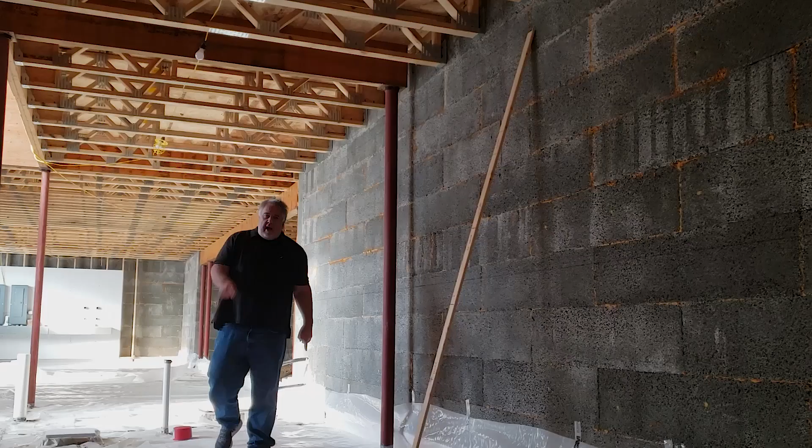We're back out at the Vineyard Passive House, and even though I'm in the basement here, we're not talking about the basement anymore. We're going to talk about floor framing because I think we did some pretty cool stuff here that is somewhat atypical, but it's a really good solution for what we got going on there.

If you remember, we did our foundation out of the Perfect block. We got 11 courses here. They're 12-inch blocks. We got 11 feet, yields about a 10-foot ceiling here. But one of the issues, if you remember when we talked about the Perfect block, was how do we put the floor frame and get it closer to the ground?

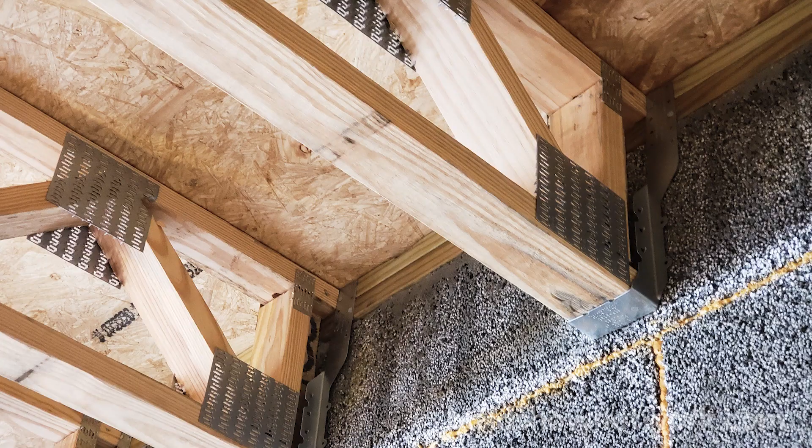Well, the solution was, you can see, we hung the floor frame inside the block foundation. So we have these Simpson hangers that are actually saddle hangers. They go up and they go over the top of the mud sill, and we'll look at this in detail. But you can see basically the whole floor frame is hung down inside the foundation wall. So that means that we can bring our grade up much higher. So the outside ground is pretty much right about the level of the bottom of these floor joists.

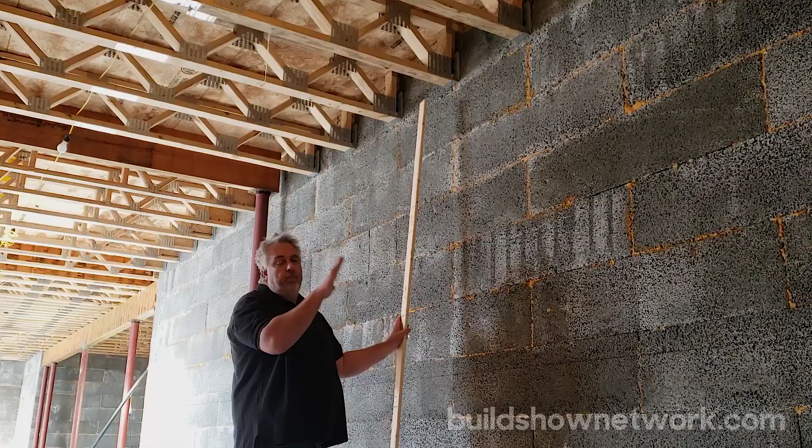These are an open web, trimmable joist, so you can see all the services we can run through, plumbing, etc. through there. But you can also notice on this side, it has this trimmable edge. Now this one is damn near trimmed to the end, but this comes out where this trimmable edge is about 12 inches, so that you can cut it to length here on the site. So we don't need this perfectly measured floor truss. They send them out slightly oversized and then we trim them back.

But again, just dropping that floor frame in here makes a world of difference. We can jump outside and we'll talk about it a little further, and it may help put it a little bit more in perspective. So let's jump outside and take a look.

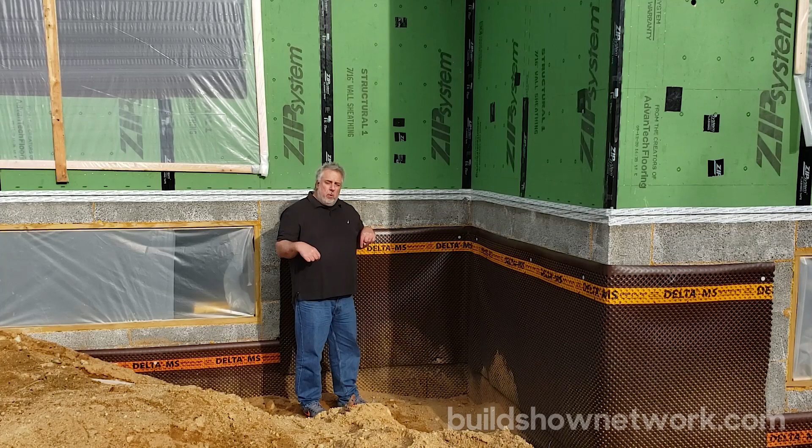All right, so we're down in the basement, we talked about that floor frame. We jumped outside here to give you the exterior perspective. I'm down in a hole. You can see we started backfilling the foundation. Perfect block recommends some type of waterproofing or drainage system. So here we went with a Dorken Delta mat. You can see it's a dimpled mat that once it gets pushed up, water has the ability to infiltrate and go all the way down.

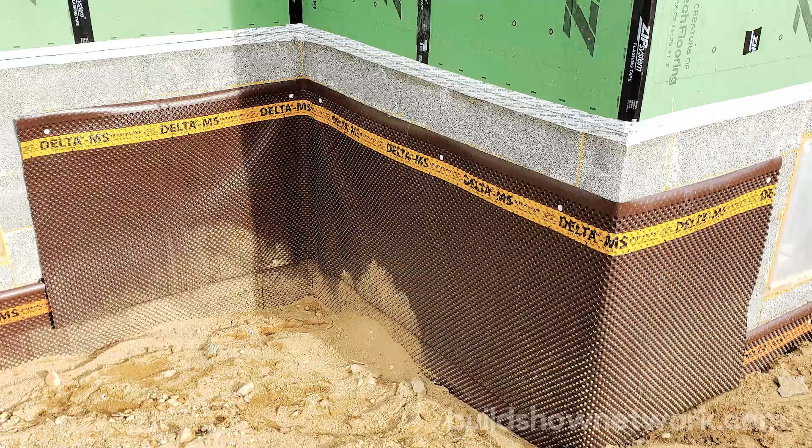Now, in this house here, we don't have a perimeter drain, and it's always measured by the amount of risk that needs to be taken. In this case here, this sand goes down for many feet. You could pour buckets of water, it just literally disappears. So we don't have that high water table or the risk of having any water accumulate. We just need to get groundwater to move down fast along the foundation. So the Delta MS mat is going to handle that for us. It's going to run that water down, get rid of it.

But we're up here more to talk about the relationship of that floor frame. Remember, this is the top of the Perfect block. So our floor joists downstairs are hung down, probably about 12 inches or so, and the saddle hanger sits on top of the mud sill. So basically, the bottom of that truss is right here where my hand is, where the grade is roughly. And the floor is right here. So the grade will finish here. We'll be about a foot above grade with that floor.

Now the difference is if we did that traditional framed floor, instead of being in here, we'd be up here somewhere. So we'd have to make up that difference in the steps. And talking with Farley, who's the homeowner here, we want to try and get that down as close as we can, so any of our doors is a single step out.

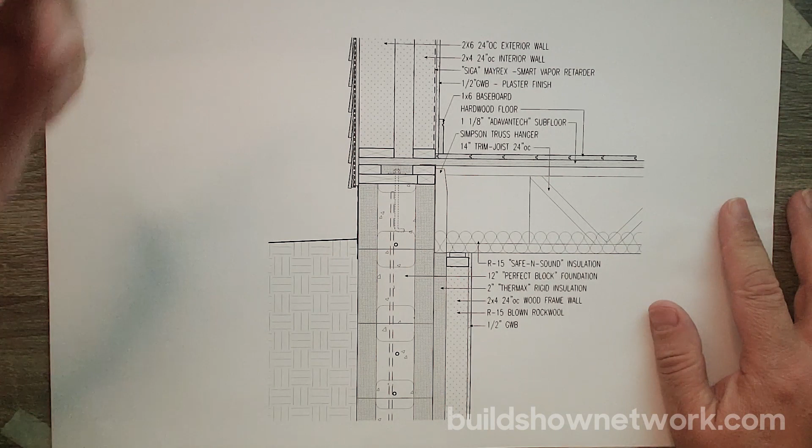So, let's get out our good friend, Big Red, and let's break out a detail and let's talk about what we saw out there. So let's get at it. We got our detail. Means we got action. All right, so let's figure out where we are. Let's get some orientation here.

Foundation wall, better known as the Perfect Block. If you haven't seen those videos from the previous versions, suggest go check them out. Not only do we talk about the Perfect Block, we caught Farley and his guys for a couple days, followed them around while they were installing the block. So you get to see it all get installed. It's a really cool product.

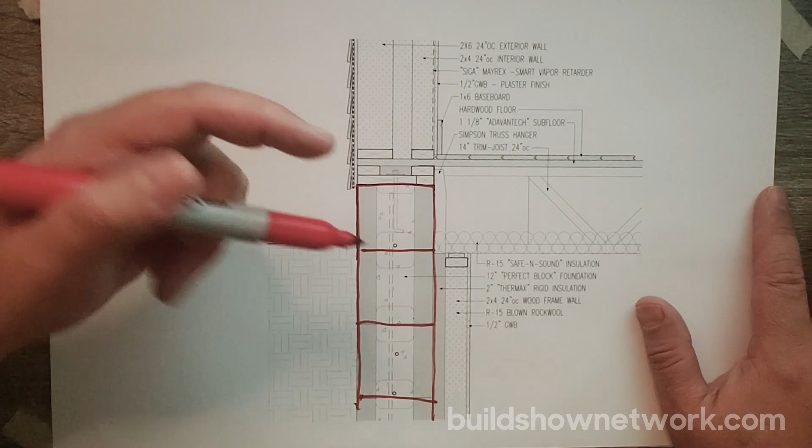It's an ICCF, which is insulated composite concrete form. This is all recycled EPS. So it's doing a good thing by having those EPS boundaries on the block and minimizing that concrete core. We take out about 70% of the concrete out of the foundation wall in doing this foundation system.

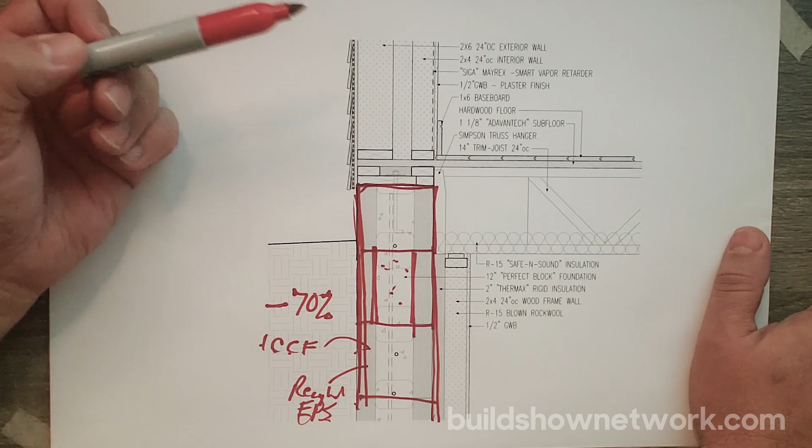And the thing is we really didn't have to pour it or add any block other than what we would normally do. Now, we talked about it out there. We got a 10-foot roughish basement height, but that's because we added a few blocks to get the basement height. Adding the block did absolutely nothing for this detail. What we did in this detail was basically relocate the position of the floor frame.

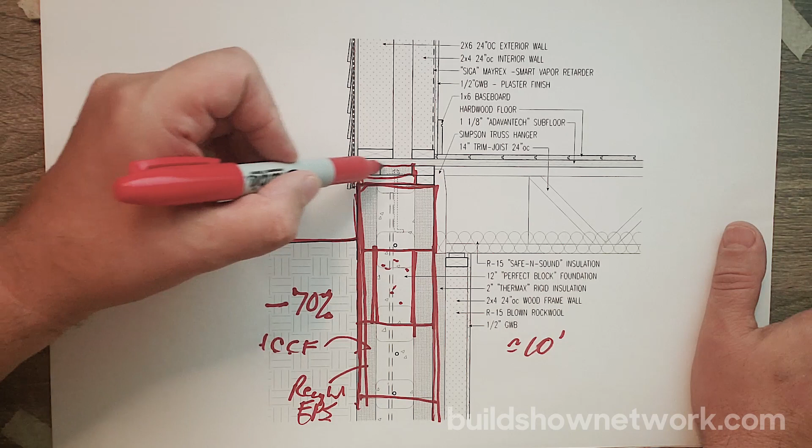If we had the block here, and here we have our grade, finish grade, and top of block, right there, well, that dimension, X, remains unchanged regardless of what we do. But the difference is everything after that point. Typically, we would do a mud sill. In New England, we would do a double mud sill. We'd anchor bolt that in, and we have our reinforcing.

But then we would come in here. We would typically run our band joist and run our floor joist off the top of that and have our subfloor. So you'd see our subfloor frame would be pretty darn high. Typically, this is on the order of maybe about 25 inches, plus or minus.

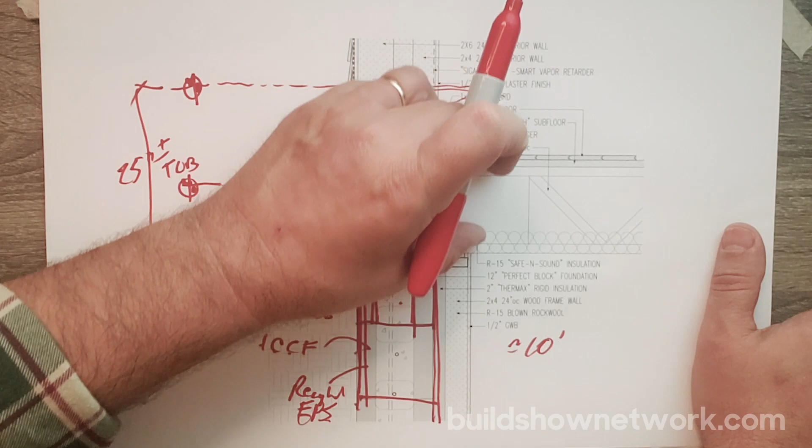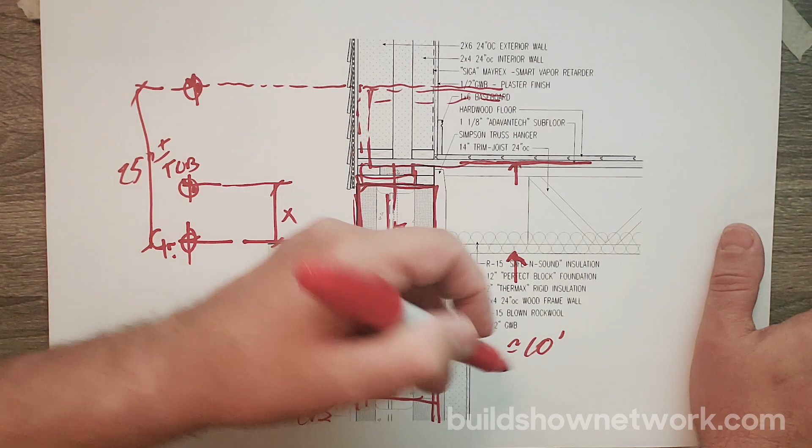But by taking this floor frame and sliding it down inside the belly, well, yeah, it reduces what would have been the ceiling height here to the ceiling height here, but that's simply solved by just adding a course of block in the wall. What you're doing is pushing the slab deeper into the ground to get that 10-foot height. But the relationship of top of block to grade would remain unchanged. Slab to grade is the dimension that changes.

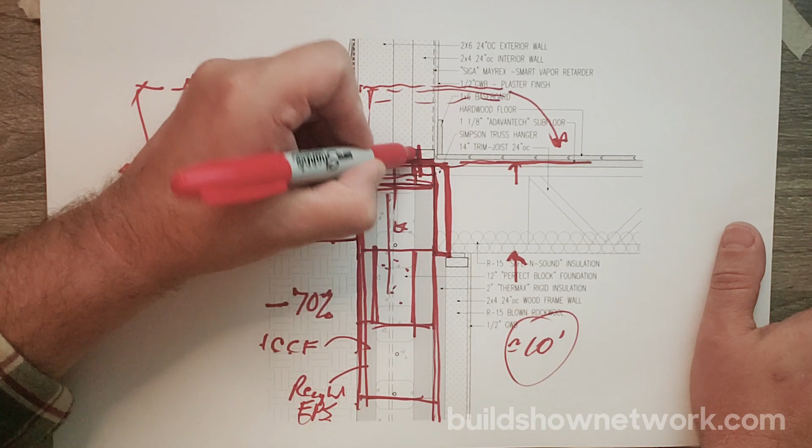But taking this and moving it down, well, we have our double mud sill. We had to add a couple blocks out here, but then we worked with Simpson to get the right hanger, and basically we installed this saddle hanger, and it gets attached up here and basically just receives that floor truss.

Now, the floor trusses out here, they're a pre-manufactured item, but they're what's called a trimmable floor joist, or floor truss. So they come out with a solid end piece, and that solid end piece can get trimmed. Typically, this is about 24 inches of trimmable length, and we just trimmed it back. You can see the one out there in the video on the site. We trimmed it back pretty significantly.

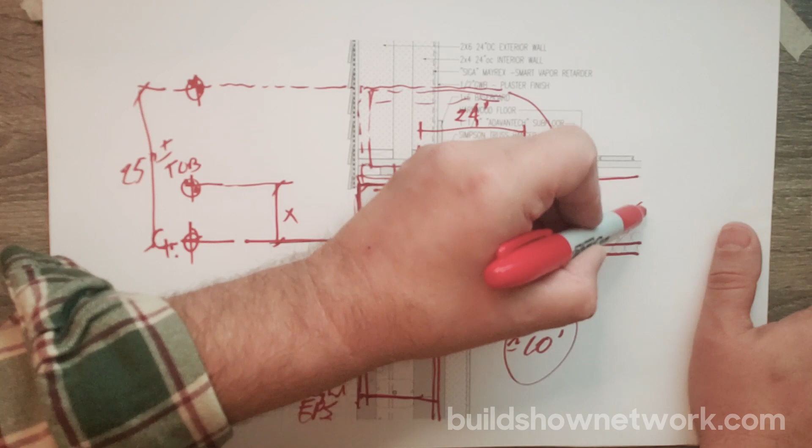And then it has the open web truss, so we can run utilities through that system. So having that trimmable end means we get the benefit of the floor truss, but we don't have to get that exact length and get those pre-manufactured to a very specific length.

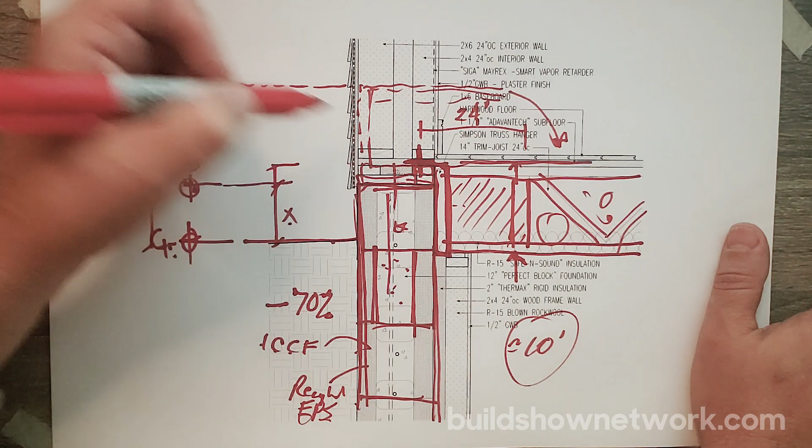They get sent out there within 24 inches, and we trim them to size. But you can see by moving that down, we basically have our X dimension plus the double mud sill plus the subfloor, and then that gets us kind of our floor, top of floor here, dimension down to grade, right?

And you can see that's a significant drop from what is a traditional floor frame to what we did out there. And the beauty of that is by bringing this down, the client really wanted to be able to just come in here and put in something like a granite block and have that one step down to the granite block and then one step down to grade, rather than have this up here with some kind of wood frame and handrails and multiple steps down to grade.

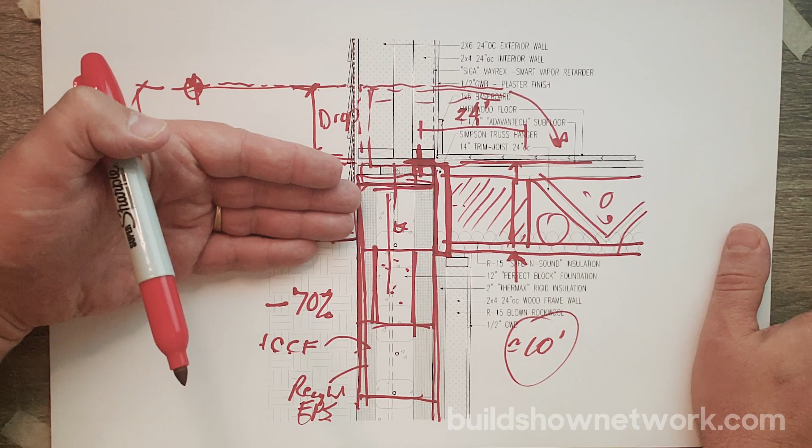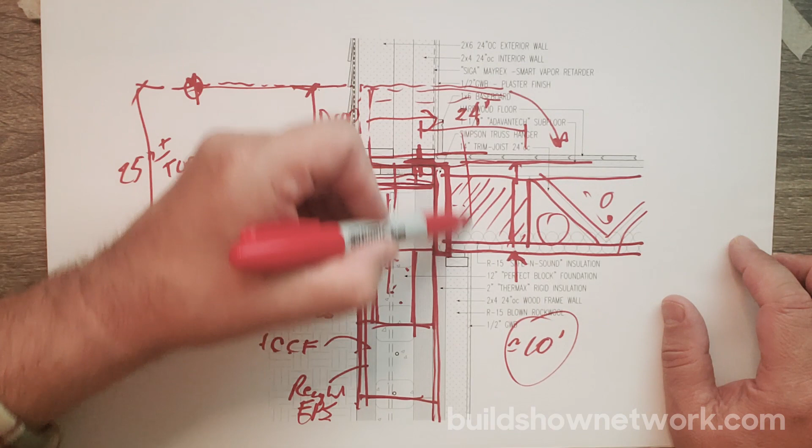We really brought that house down to the finish grade, finish elevation to really get that much stronger connection between that floor inside and the grade outside there. And again, it was simply by eliminating that typical bearing situation where we just set those floor joists on top of the mud sill, to moving to the saddle hanger and basically just taking our floor, shrinking it the 12 inches in length, and then dropping it down inside that foundation wall, so that basically the subfloor runs out over the top of that perfect block.

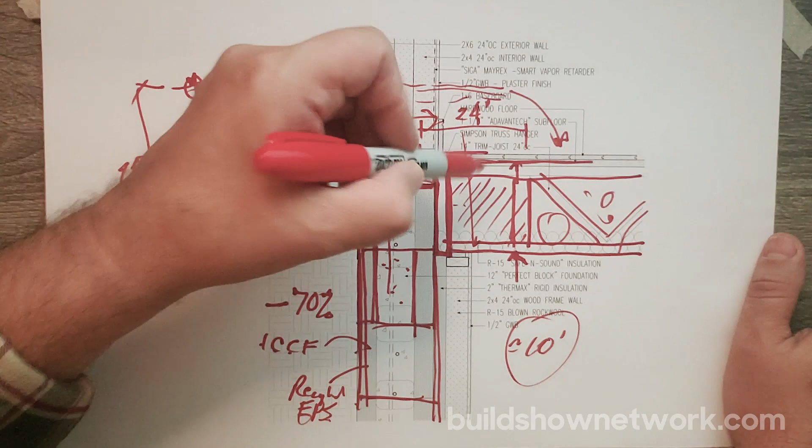So it worked out really, really well out there. I know the client is very happy. I've done this a number of times. Should have printed out an alternative detail that I used on other jobs, but you can do this same situation with a top chord bearing truss. So you can get that top chord bearing and run that top chord out over there, and then that would just take off from that top chord, and the bottom chord would just come out and be able to catch the drywall for the ceiling there.

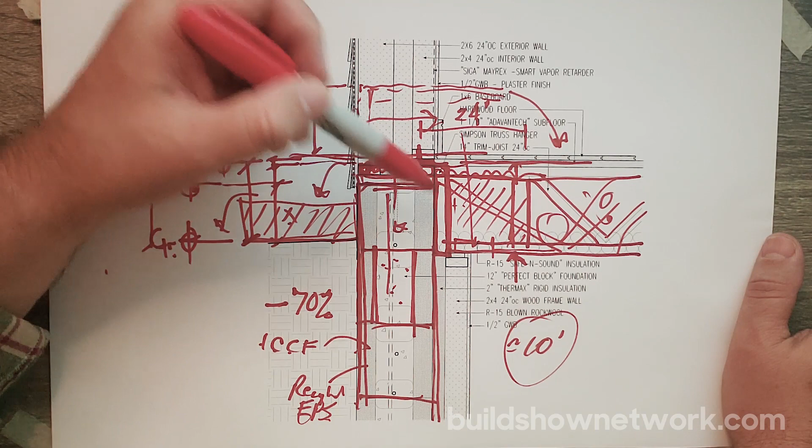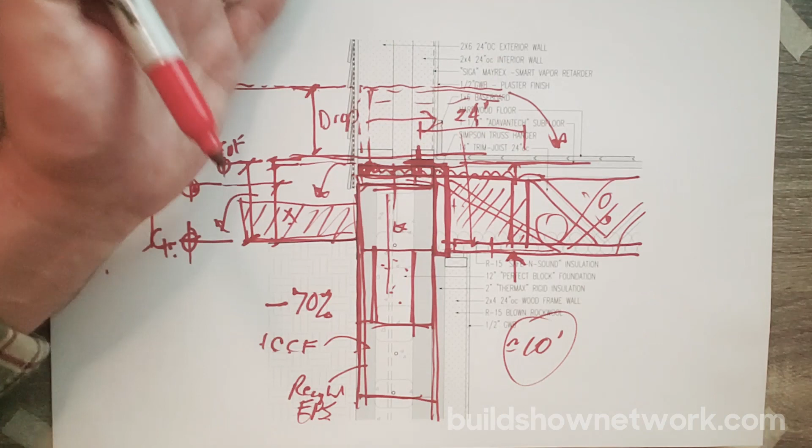But the top chord bearing truss does pretty much the same thing. By moving from a bottom chord bearing to a top chord bearing, you lose a little bit of capacity in the truss and what it can carry, because it's not that gravity at the bottom, it's gravity being basically hung. So we lose a little bit, but it still is possible. It depends on the size of the house and truss spans and all of that good stuff.

But anyways, hope you enjoyed this. Big Red saved the day again, came out, gave us a little bit of a discussion here, so hope you enjoyed it. So there you have it.

Big Red is going to bed. So I know, you guys didn't think I was a poet. I am. Didn't even know it. Ha! See what I did there?

Anyways, so building construction, Martha's Vineyard, passive house, floor framing. I don't know if we can top this video. Doesn't get much better than that, does it?